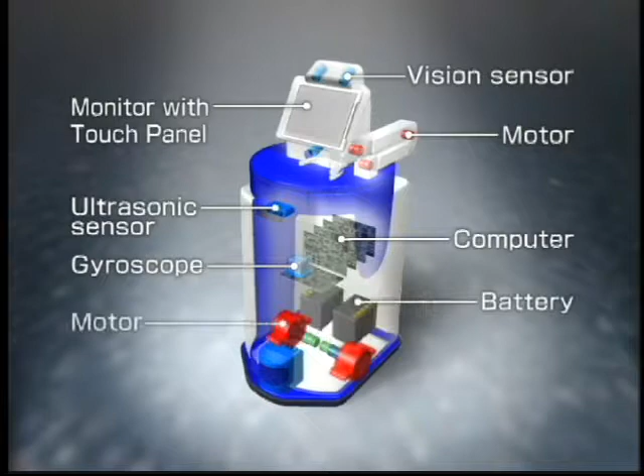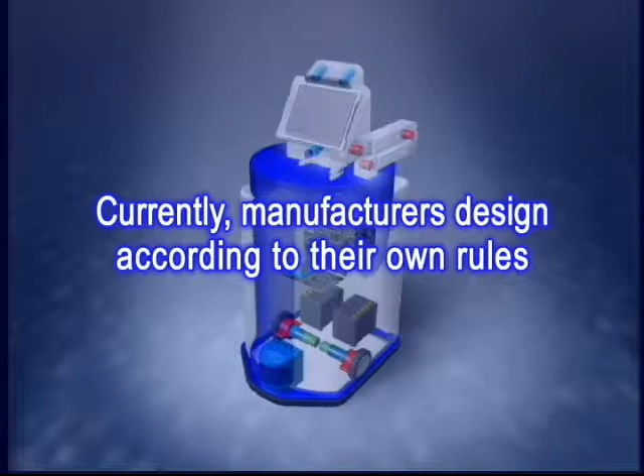Generally speaking, robots consist of various functional elements, including robot arms, mobile bases, and a variety of sensors. Currently, each manufacturer develops robots according to their own unique design rules. As a result, developing the software for new robots with multi-vendor components requires considerable knowledge and effort.

This project proposes an open robot architecture based on software modularization of robot elements. RT middleware is developed as the fundamental software for developing the robot system. Using this technology, various service robots can be easily developed.

RT middleware helps us to create modules with standard interfaces. From now on, we will call these modules RT components. The RT middleware consists of RT components, which form the middleware's framework, and supporting programming tools to operationalize the RT components as programs. An RT component consists of command interfaces, input interfaces, output interfaces, and RT function activity.

This activity realizes original RT functions, such as servo control and sensor processing. Input and output interfaces are used for data transfer between RT components. Command interfaces are used for slower communications, such as acquiring information from components and switching operations.

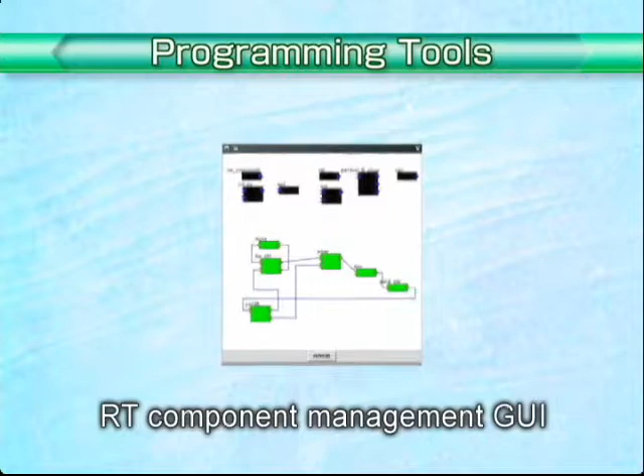The RT middleware programming tools include an RT component builder, which supports the creation of new components; an RT component composer, which supports the combination of components to form new ones; and a graphic user interface, which connects up existing components to create new functions and controls RT component operations. The programming tools can have a range of other functions as well.

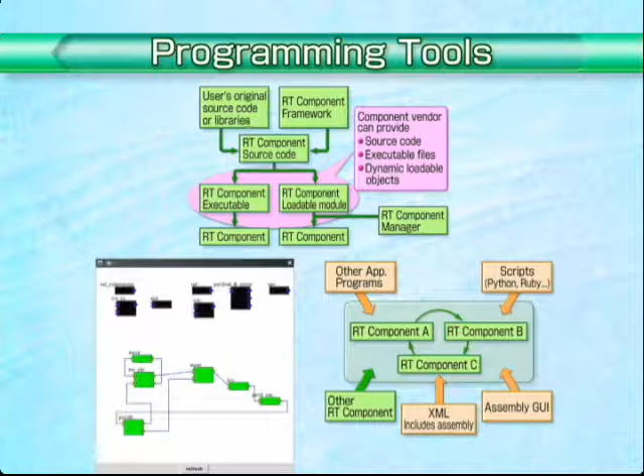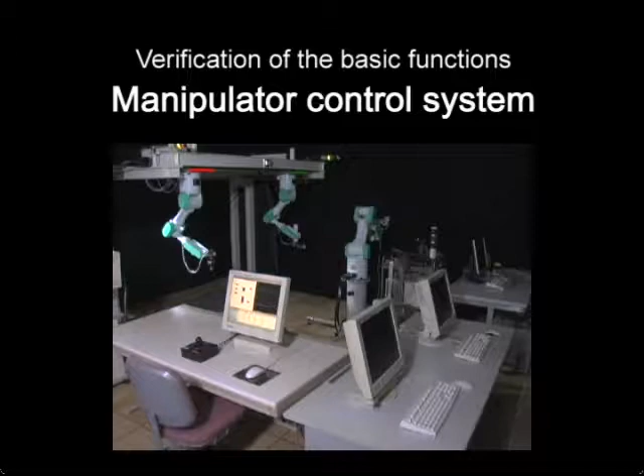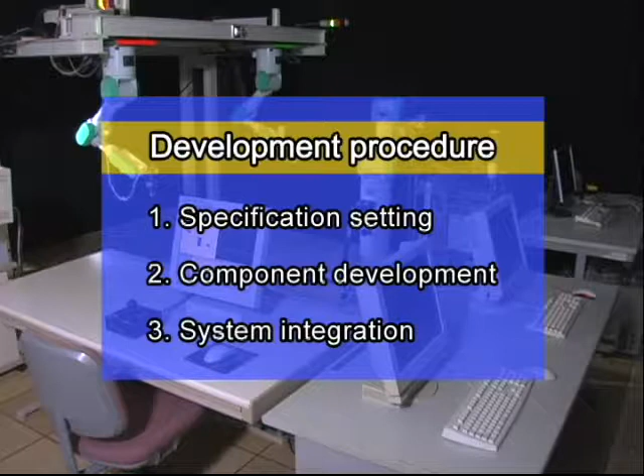As one example of RT middleware, this project developed OpenRTM-AIST. This is an example of a robot arm control system developed using the RT middleware. The system is developed in 3 steps: specification setting, component development, and system integration.

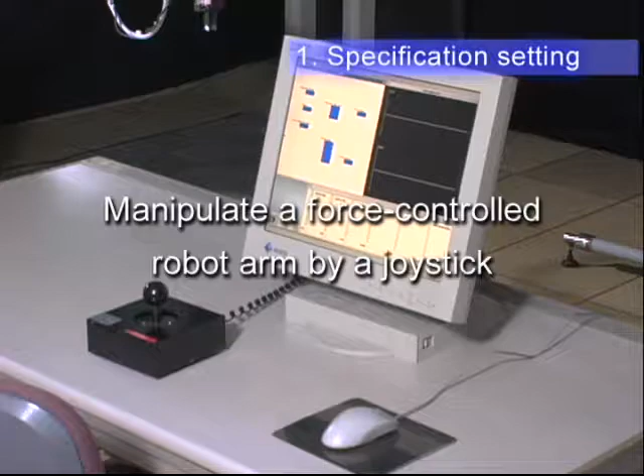The system to be developed here uses a joystick to manipulate a force-controlled robot arm. After specification setting comes component development. The following 4 components, crucial for the construction of the system, were developed.

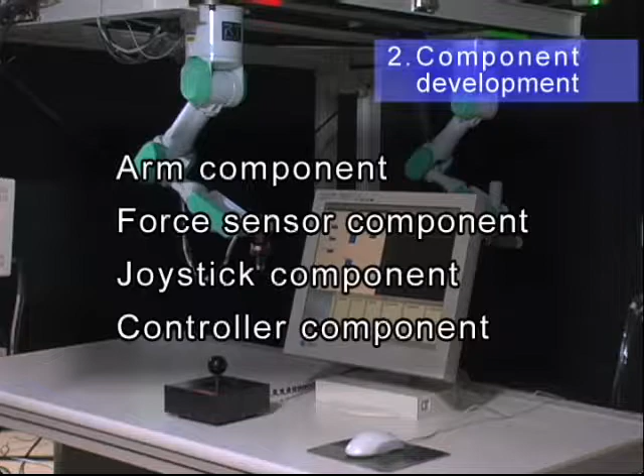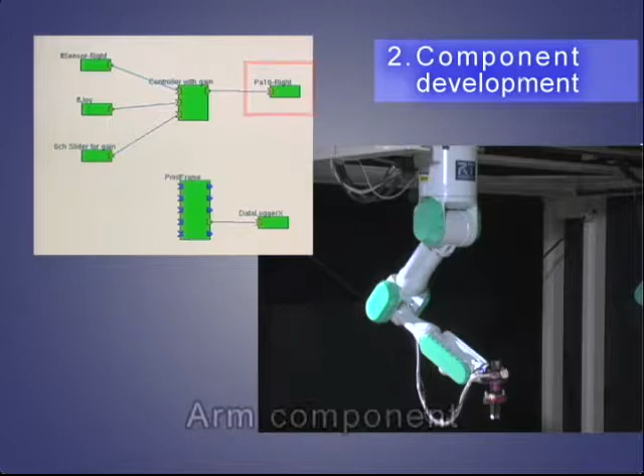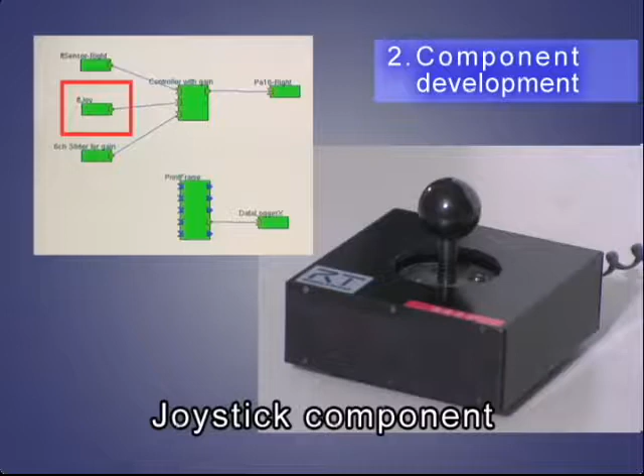An arm component with a port for receiving speed commands for the arm's end effector. A force sensor component with a port for outputting force and torque. A joystick component with a port for outputting applied force and torque to the joystick. And a controller component using damping force control laws.

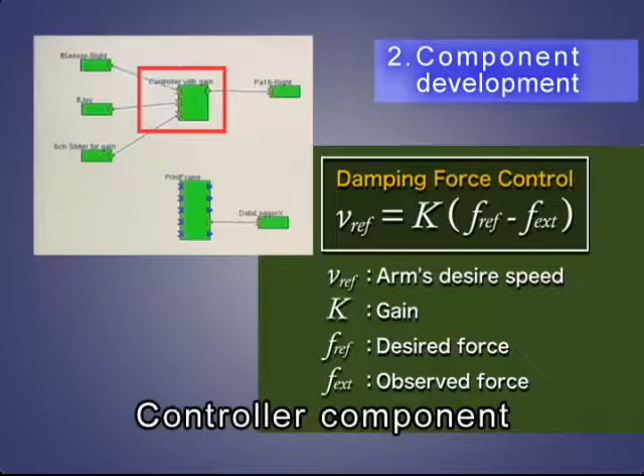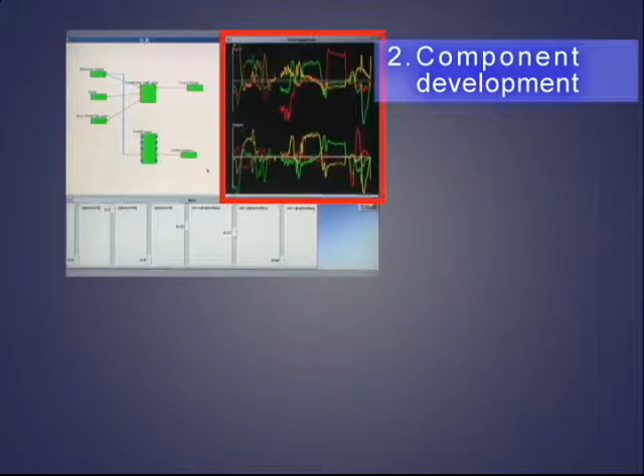A further 2 components were also developed for system coordination: a slider component to regulate the feedback gain, and a data logger component to display and store the data from component output ports.

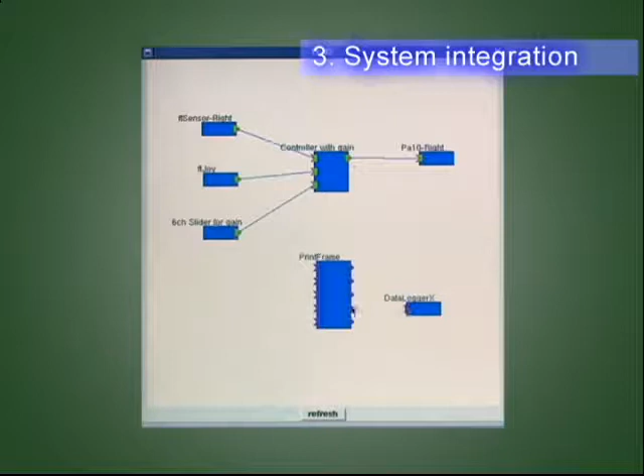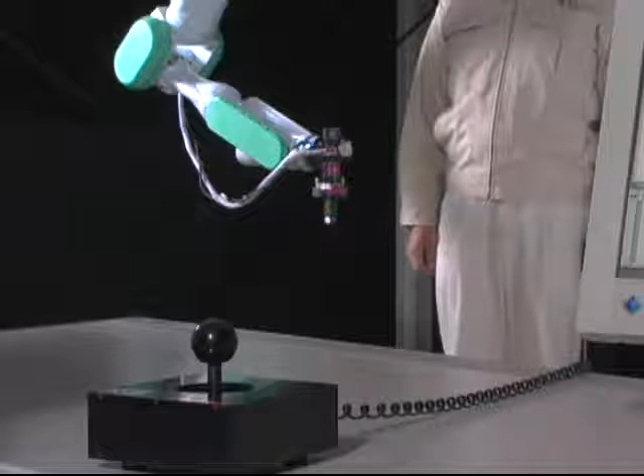When the necessary components are ready, systems integration begins. The system can be put together quite easily by connecting the components' input and output ports. Next, the completed system is test run with real-time control.

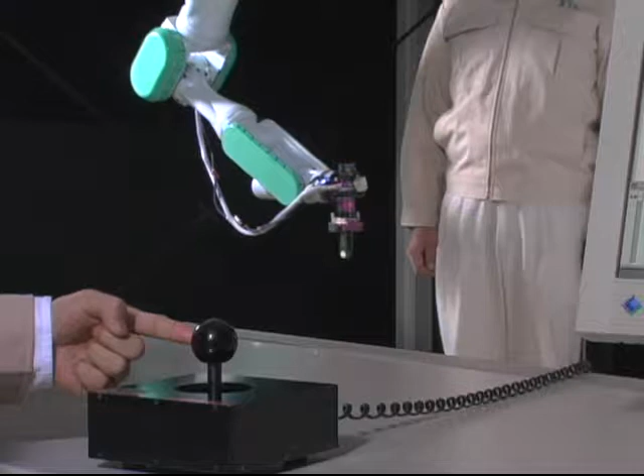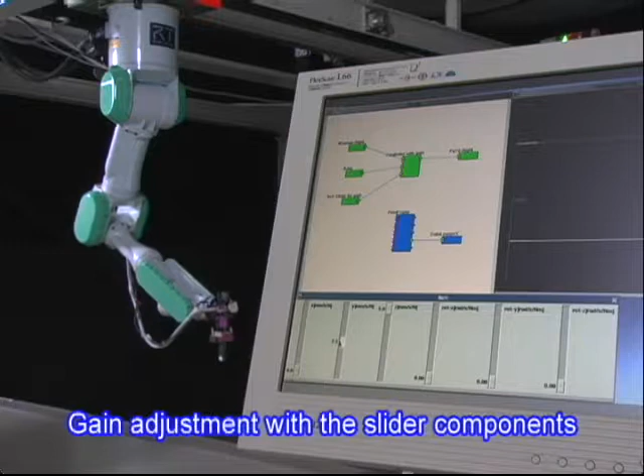The arm is manipulated by a joystick. Its force can also be controlled. The slider component can provide real-time gain adjustment.

The data logger component allows output to be monitored. Simply connect it to the port of the component whose output you wish to check. This graph shows the operating force to the force sensor.

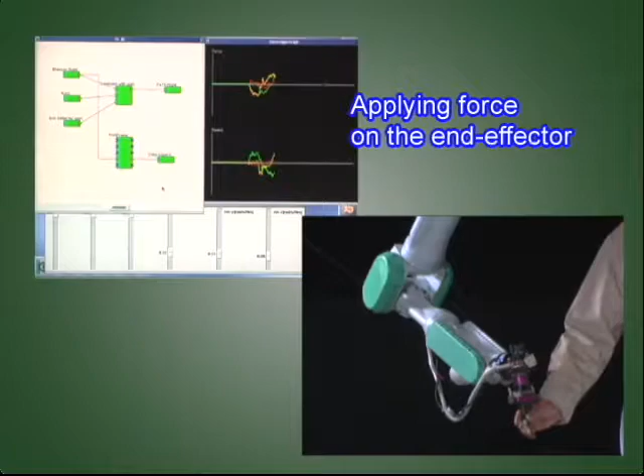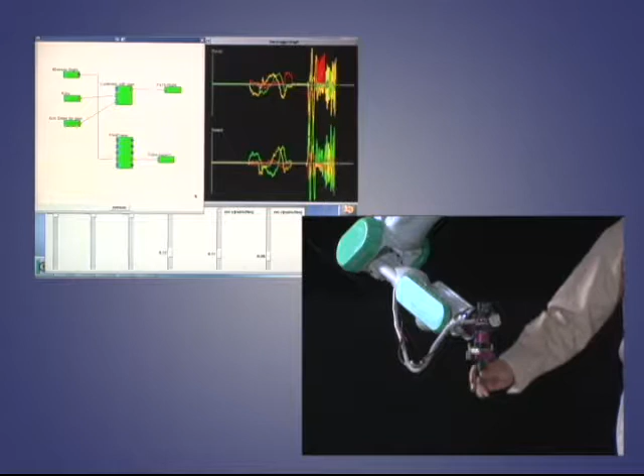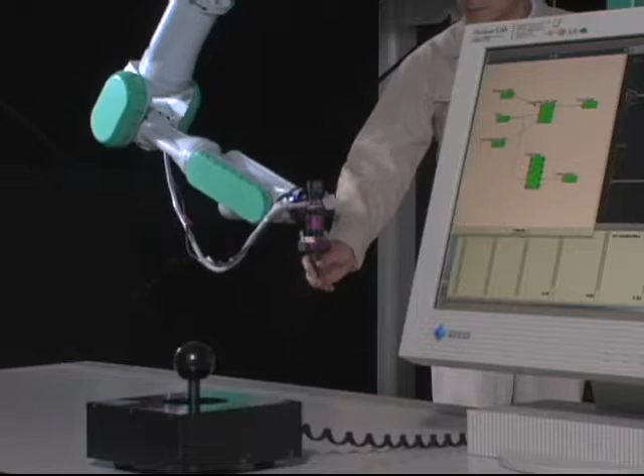If you disconnect the output from the force sensor component, the arm does not respond to force. Then, when the force sensor output is reconnected, the system responds again. It is very easy to change the configuration of the system.

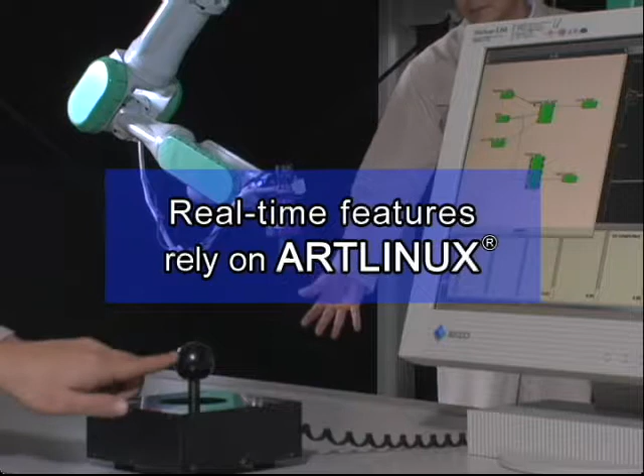The system's real-time features rely on ARTLinux. The general-purpose features of the RT components make building and modifying RT systems simple. Systems can be easily developed for various needs.

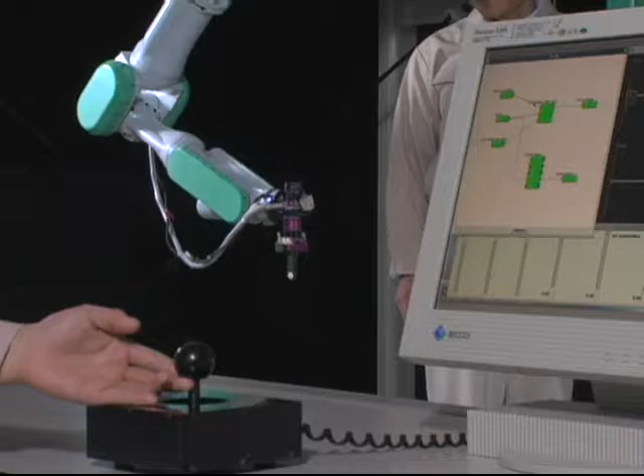Because the RT components all share the same specifications, they can be used interchangeably. For example, if we design the arm of a humanoid robot as an RT arm component, it can also be operated using the joystick component.

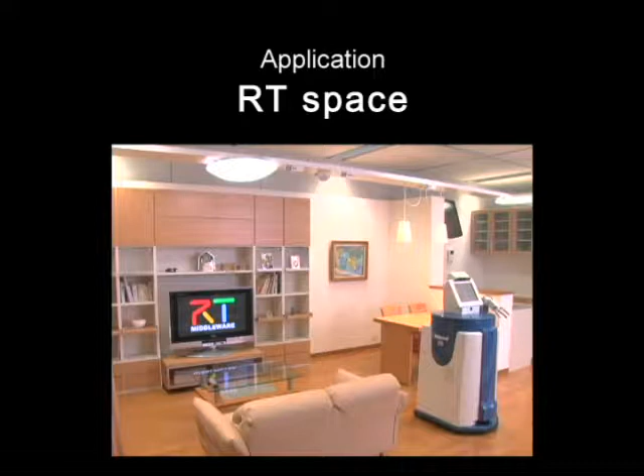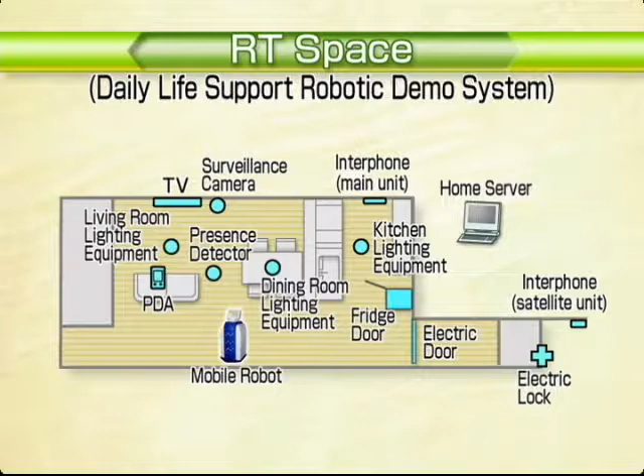Next, let's take a look at an RT space, another demonstration of the effectiveness of the RT middleware. In the RT space, multiple sensors, actuators, and other robotic elements collaborate through a local network to produce a complete lifestyle support application.

So how does the RT space work? When controlling the robot with a PDA, for example, commands issued from the PDA ask the configuration server for the appropriate robot operating script, and are executed by the script service. The request is made through the home server's action proxy.

At that time, the naming service is asked for the network address of the RT component specified in the relevant robot operations script. Using the network address obtained, a command is sent to the RT component and the action is executed.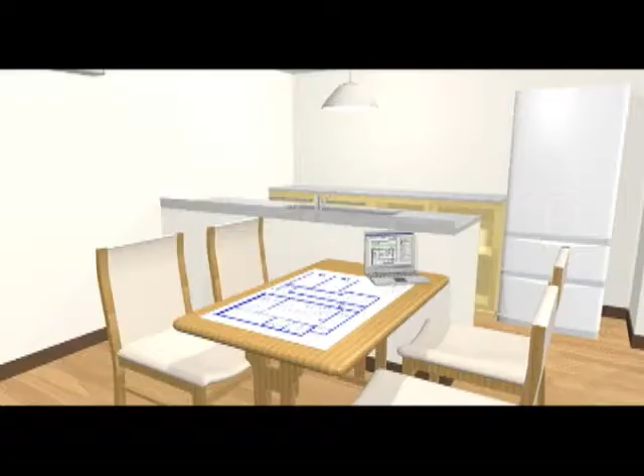Let's look at an example of a robot system developed using the RT middleware. The person in charge of building the RT space, the RT integrator, takes care of the whole process, from selection of the RT components to creation of the application software, customizing the process to the user's needs.

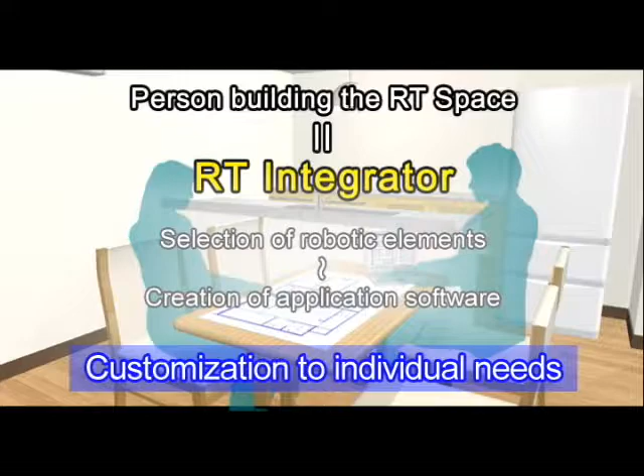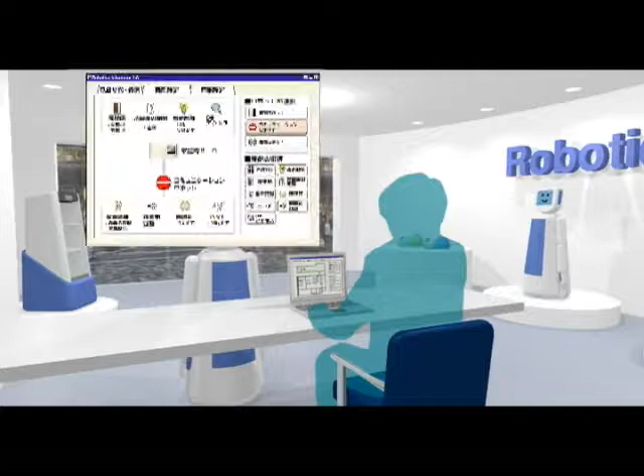The modularization of robotic functionalities into independent RT components makes it easy to design an RT application that exactly suits a user's needs. And the wide range of services and graphical tools provided with the RT middleware greatly facilitates the building process. The RT middleware easily accommodates the addition, modification, replacement, and removal of RT components, independently of individual makers.

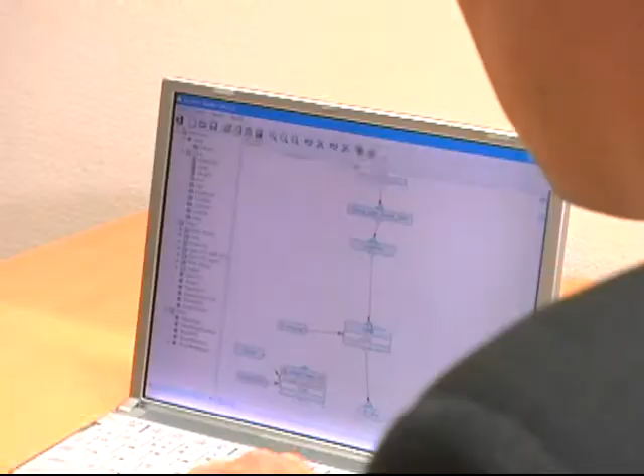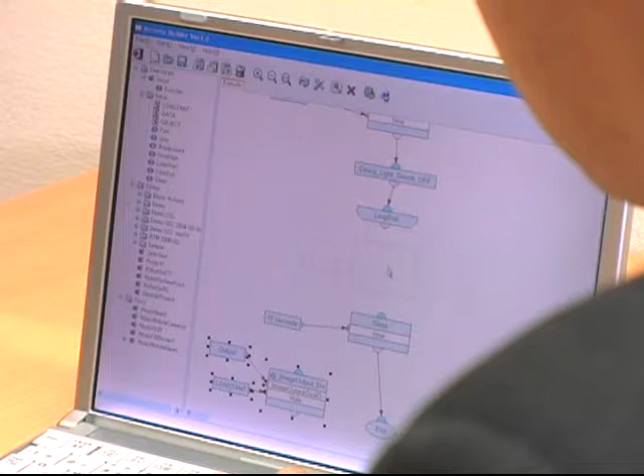Finally, the robot is delivered to the user. Any modifications requested by the user can readily be performed on the spot by the integrator using the RT middleware tools and services. This includes modification or expansion of functions even after delivery. Here, a new function has been added to the robot: the ability to fetch a drink from the fridge.

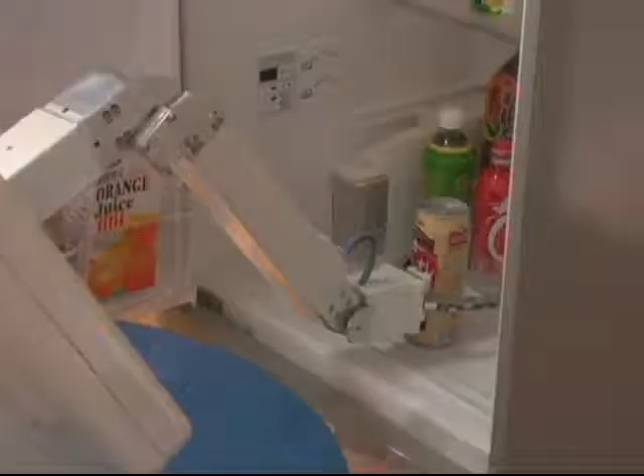A wide range of RT components is already envisaged for living environments. These include security systems, home appliances, house equipment, and eventually mobile robots.

The RT space can be controlled from inside the home by directly sending requests to the home server, and connecting the system to the internet via the home gateway allows you to control the system even when away from home.

RT middleware technology will help create new markets. Even small venture companies will be able to offer RT components with their own unique and specialized technology. Through division of labor and specialization of the service robot industry, integration business will be born.

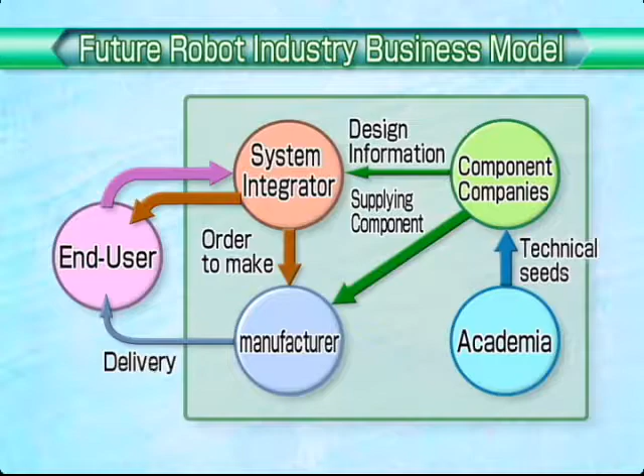RT middleware technology is the key to reforming the structure of the robot industry. We have already started working toward the standardization of RT middleware. This innovative technology should make possible the development of robots that can respond to the diverse needs of everyday life.